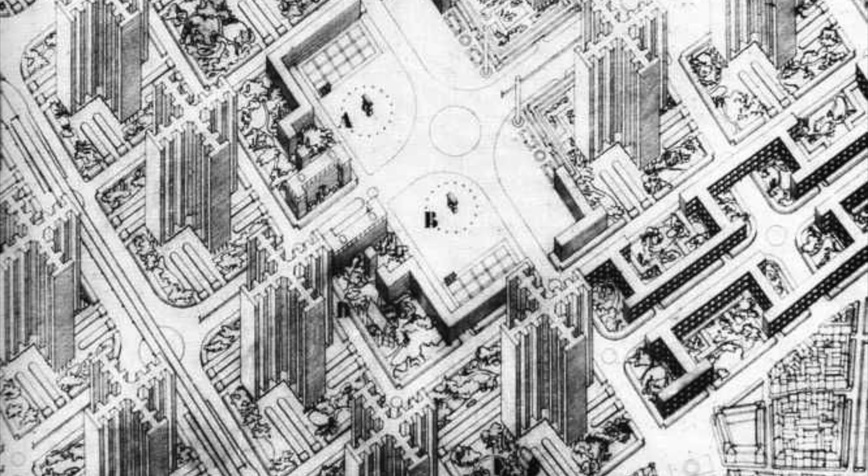The core problem for architects of the 20th century was the ordering of society around the idea of industrial production. In the past, architects focused on the craft of a master mason or the master carpenter. In the industrial age, this craft was abandoned and replaced with mass production.

What forms were best for communicating this new organization in society? Should we design all buildings to look like factories and all housing to look like factory worker housing? "An architect must be a prophet in the truest sense of the term. If he can't see at least 10 years ahead, don't call him an architect."

Frank Lloyd Wright. The second problem of the 20th century was new technology. How should architects incorporate new scientific breakthroughs into architecture? Electric lighting, HVAC, and structural design were all new to architecture.

Walter Gropius said, "We want an architecture adapted to our world of machines, radios, and fast cars. With the increasing strength of new materials, steel, concrete, glass, and with the new audacity of engineering, the ponderousness of old methods of building is giving way to a new lightness and airiness."

The third problem to be solved was one of new industrial materials, glass, steel, concrete, and aluminum being the most important. The fourth problem was to develop a new modern concept of space. How do architects represent the fast space of an automobile, a train, or an airplane? Architects responded by creating interlocking spaces, hovering volumes, and interpenetrating planes.

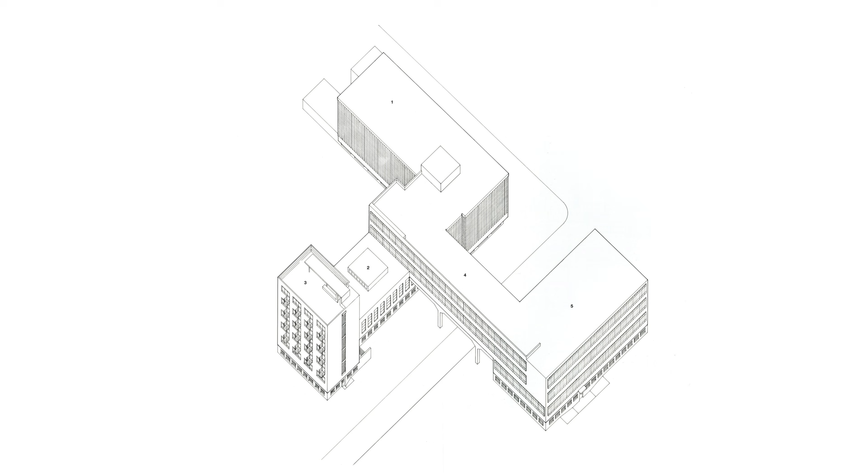It was a reaction to mass industrial production and was based on radical workers' groups. The mood in Germany was a juxtaposition of angst and despair with hope for a utopian future. In this context, Walter Gropius founded the Bauhaus in 1919. Its aim was to fuse art and craft using new industrial processes and technocratic ideals.

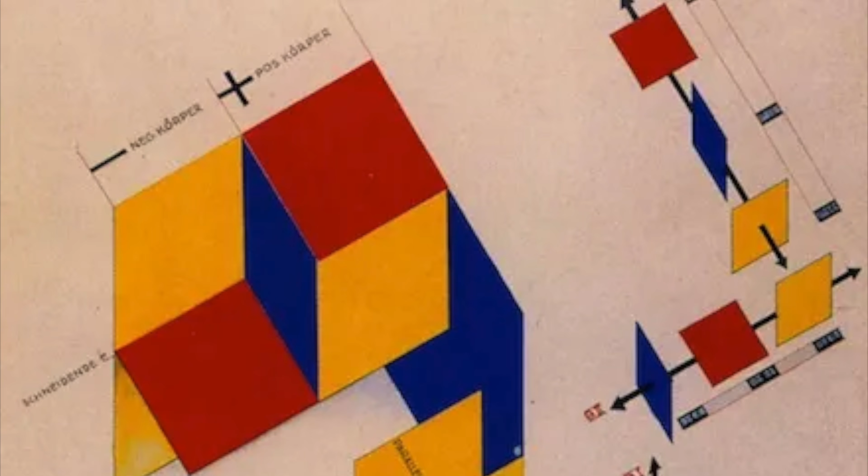At this point, architects were learning how to integrate new technologies of mass production, glass, and steel to create a new visual language of forms. Gropius had students design for mass production and seek to express these new values of mechanization. Gropius had a huge effect on architects such as Paul Rudolph, I.M. Pei, and Philip Johnson. The Bauhaus has had a huge effect on culture, from mass-produced multifamily housing to IKEA.

Number 9. S.O.M. S.O.M. isn't a specific architect, but an architectural firm of many architects. It started as Skidmore, Owings, and Merrill. At one point, it was the most important architecture firm in the world. They're on this list because they had one of the most important roles in developing modern architecture.

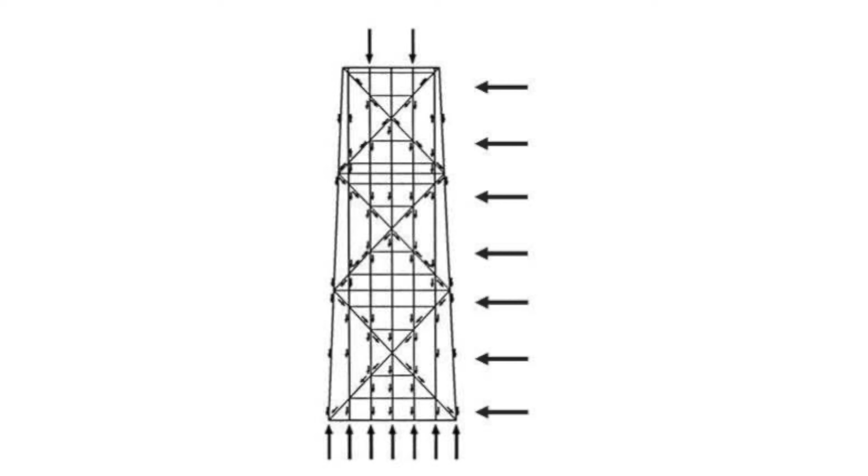Specifically, they designed the modern form of the skyscraper and some of the tallest buildings in the world, to include the John Hancock Center, the Willis Tower, One World Trade Center, and the Burj Khalifa. The John Hancock Center, 1969. The John Hancock Center of Chicago of the 1970s was designed by Bruce Graham of S.O.M. They took the Miesian formula and modified it to be diagonal braced tubes. This cross-bracing dealt with the lateral wind forces.

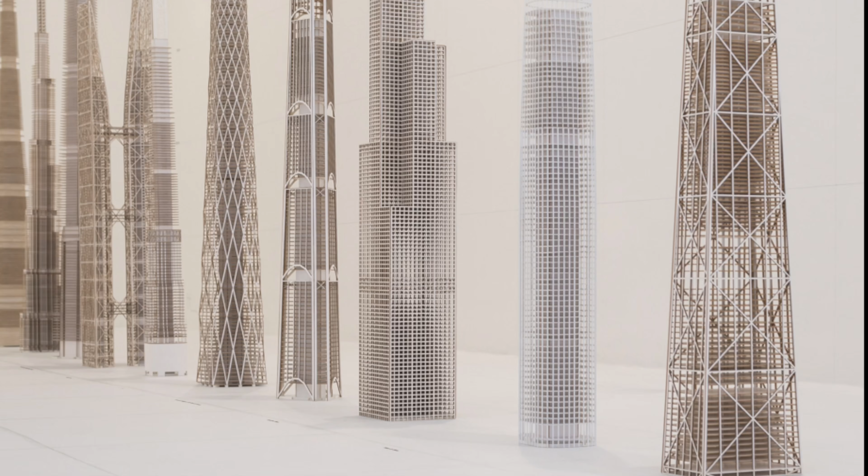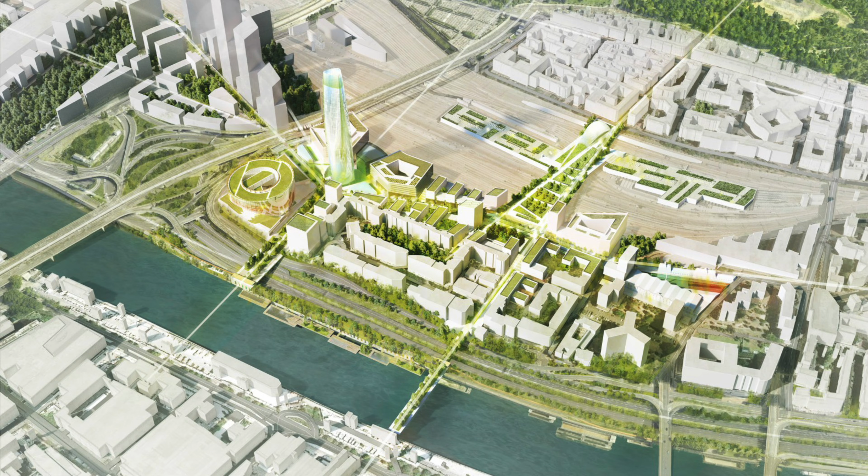S.O.M. developed a standardized big business version of Mies van der Rohe's technological purity, the steel frame, tinted glass, and refined finishes. They epitomized American love for high technology and megastructures. The skyscraper was a central preoccupation of American architecture and symbolized capitalism's dominance over the world. They are the prototype architecture firm that integrates structural engineering, architecture, civil engineering, urban design, and interior design.

The Burj Khalifa has been the tallest skyscraper in the world since it was built in 2010. The design is based on Islamic architecture of the region. The primary structure is reinforced concrete with some structural steel. It was designed to be a centerpiece of large-scale mixed-use development.

One World Trade Center, New York. Designed by David Childs of S.O.M., One World Trade Center is the tallest building in the United States and the 7th tallest building in the world.

Number 8. Carlo Scarpa. Carlo Scarpa is perhaps the most important architect you've never heard of. He wasn't known outside of Italy until the 1980s. Unlike other modern architects who wanted to tear down traditional architecture and replace it with modern abstract forms, Scarpa was deeply sensitive to existing context and tried to integrate new with the old.

His architecture delighted in stratification, layering, and the dynamic interaction of planes. Frank Lloyd Wright was a primary influence on Scarpa. A central part of his practice was the restoration and reuse of old buildings. He developed a method of juxtaposing new with old fragments so that each was enhanced. The effect was to feel the passing through layers of time.

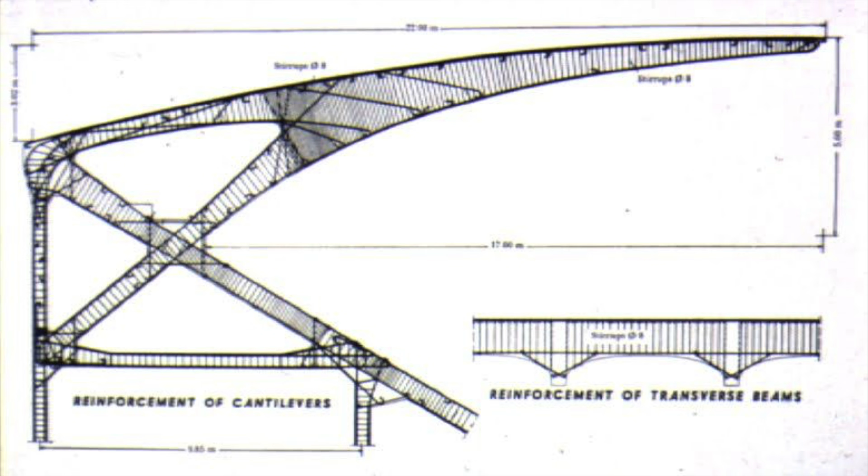Number 7. Pier Luigi Nervi. Pier Luigi Nervi was an Italian engineer and architect. His structures illustrated the engineering principle of bringing structural loads down into the foundations with minimal use of materials. Nervi saw building structure as an art. He demonstrated how engineering and sculptural expression could be synthesized into a naturalistic expression of form and function.

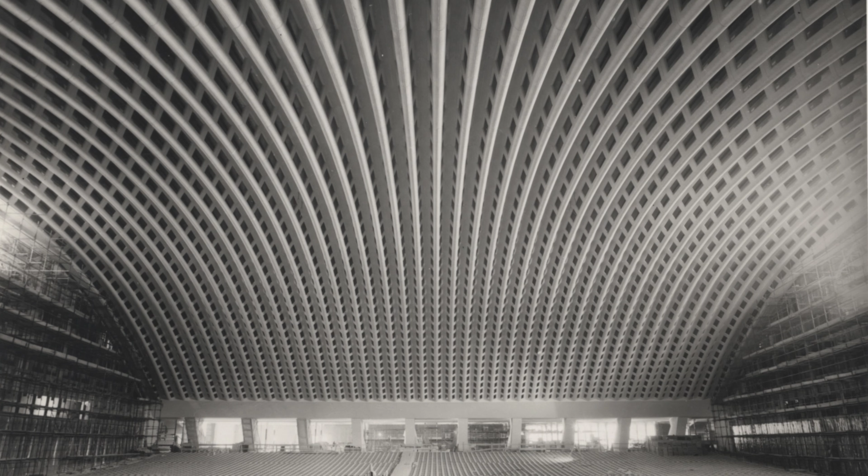Nervi was intuitive in his methods of design, and his buildings seemed like descendants of grand structures of history. His numerous stadiums, factories, exhibition halls, and bridges demonstrated how engineering and sculptural expression can achieve a synthesis of form, giving an almost natural character.

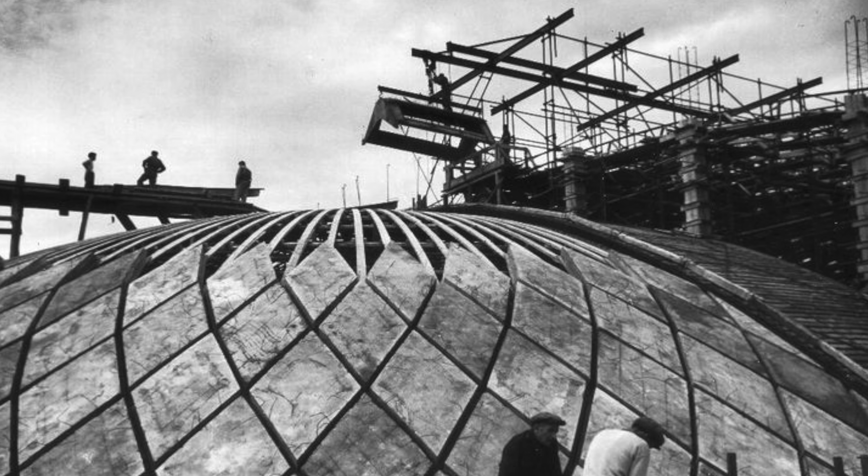Agnelli Exhibition Hall, Turin. Nervi used open precast concrete ribs with slender profiles resulting from the imprint of diamond-shaped plans to realize a shell vault. Gatti Wool Factory, Rome. Slender columns and flared capitals were supported on a radiating network of two-way beams, which expressed the pattern of underlying stresses.

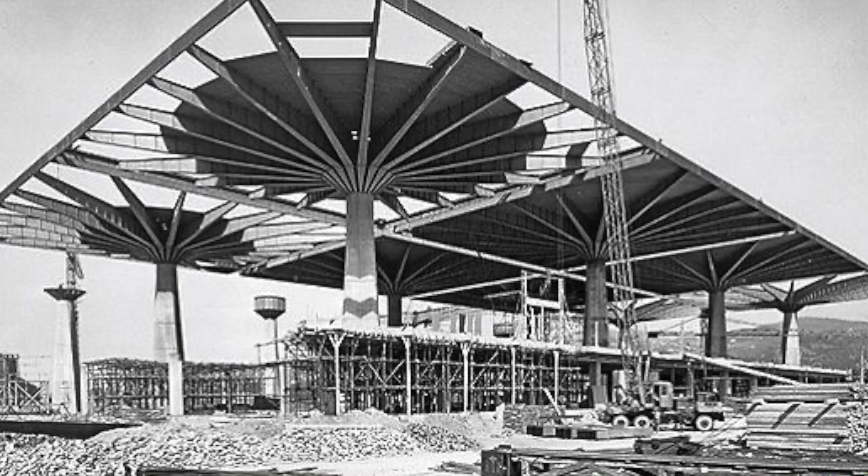Palazzo del Lavoro. For the Palazzo del Lavoro, Nervi created an open space with a grid of freestanding columns, each supporting a square roof unit on splayed beams. The solution allowed for an entirely glazed perimeter and for strips of natural light between the square roof elements. Nervi is the direct inspiration for architects like Santiago Calatrava.

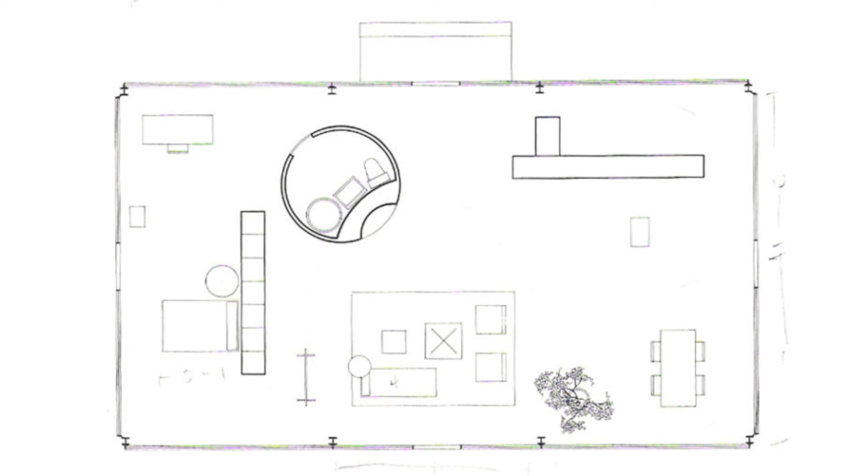Number 6. Philip Johnson. Architecture is how to waste space. In 1932, Johnson, along with Henry Russell Hitchcock, wrote the book International Style: Architecture since 1922. This did several things. It changed modernism from a technique and process of design into a style. This was a lie, as modern architecture up until this point was not a style.

Le Corbusier said, "Styles are a lie." Philip Johnson, in disagreeing with Le Corbusier, turned modernism on its head. Secondly, it turned German architecture of the Bauhaus into an international style. These two lies together created a new vision for modern architecture as an international style.

Philip Johnson was perhaps the first openly gay architect in history, coming out publicly in 1993. He was a great cheerleader for architects of his time. He helped bring Mies van der Rohe to the United States and designed the Seagram Building with him in 1954. He was the first director of the Museum of Modern Art in New York and brought Gropius and Le Corbusier.

In 1932, he organized the first exhibit of modern architecture. He was also the first to have a show on industrial design and can be said to have brought this art from the Bauhaus to the United States. Philip Johnson invented the term postmodern architecture, or was the first to use it widely. He was a great promoter of other postmodern architects such as Robert Venturi, Frank Gehry, and Michael Graves.

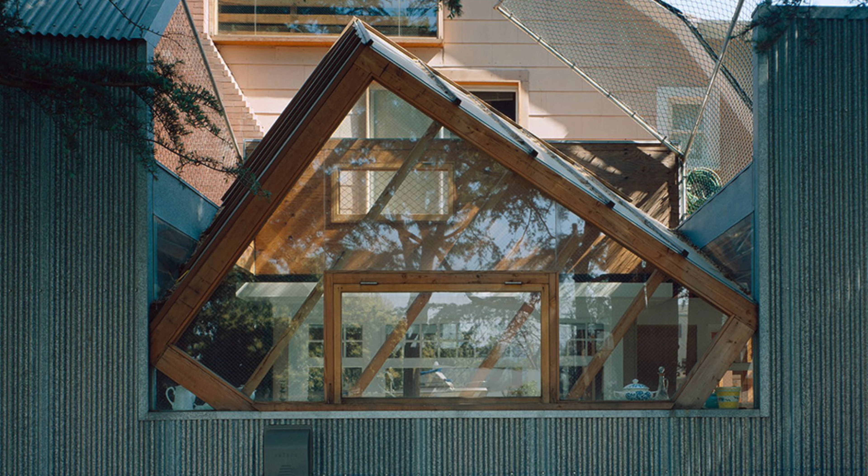People ask me if I'm an artist or an architect, but I think they're the same. Frank Gehry is a Los Angeles-based architect. He's considered a postmodern architect. Gehry said, "I think the biggest problem of industrial architecture is that it loses its sense of humanity. Minimalist stuff drains all the humanity out of it. The idea works great for the money thing, but it doesn't work well for the feeling thing."

Gehry's most famous building is the Guggenheim Museum in Bilbao. It was so successful it created the Bilbao effect, which is a term coined to express how an iconic piece of architecture could revitalize the tourism and rebuild the economy of the city. Cities around the world hired architects to design large-scale, eye-catching architectural commissions, for good or for bad.

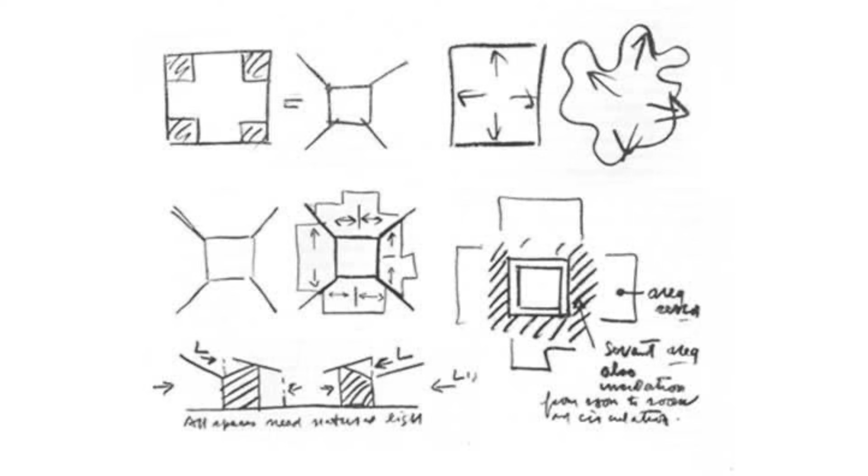Louis Kahn. Architecture is the thoughtful making of space. Kahn achieved an integration of the modern and the ancient. He was a master of monumentality. His deep humanism enabled him to avoid mere shape-making of formalists. He knew how to fuse together modern construction with traditional forms and methods. Kahn's method used the parti diagram as the main generating idea of a composition. This comes from the Beaux-Arts system.

Kahn said, "You say to a brick, 'What do you want, brick?' And the brick says to you, 'I like an arch.' And you say to the brick, 'Look, I want one too, but arches are expensive, and I can use a concrete lintel.' And then you say, 'What do you think of that, brick?' And the brick says, 'I'd like an arch.'"

Kahn said, "I would say that architecture is a thoughtful making of spaces. It is not filling prescriptions as clients want them filled. It is not fitting uses into dimensional areas. The architect's first act is to take the program that comes to him and change it, not to satisfy it, but to put it in the realm of architecture, which is to put it in the realm of spaces."

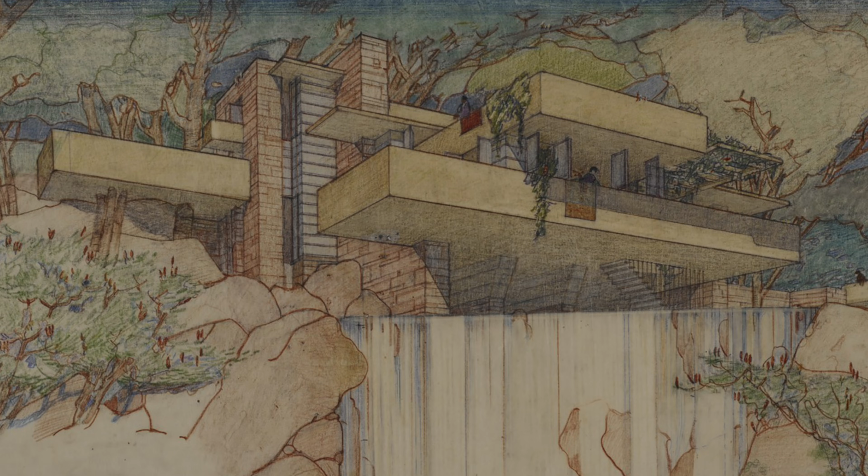Number 3. Frank Lloyd Wright. Study nature, love nature, stay close to nature. It will never fail you. Frank Lloyd Wright is often misunderstood as an architect. Some see Wright as a traditionalist with American values of individualism, naturalism, and democratic ideals. He is backward-looking, coming from the American arts and crafts movement.

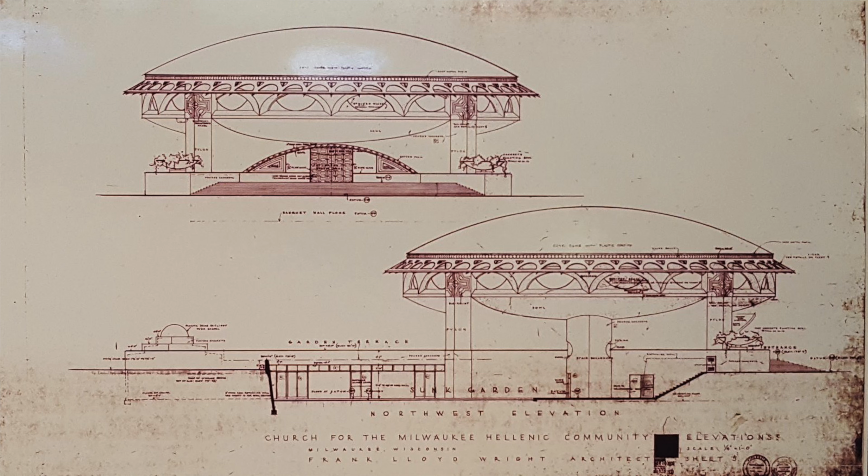Some see Wright as a precursor to modernism with modern universal interpretations of spaces and abstract massings. These ideas always compare Wright to the broader history of architecture. Both these interpretations of Wright are misleading. He was, in fact, a singular architect with his own style and worldview and does not fit easily into the history of architecture. The best way to understand Wright is his continuation of the ideas of Louis Sullivan, his mentor, and the development of his architecture into a purely individual and unique modern style.

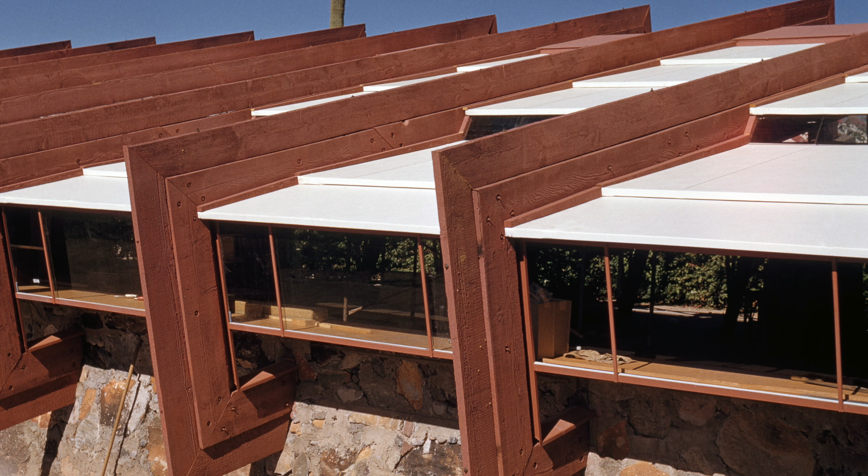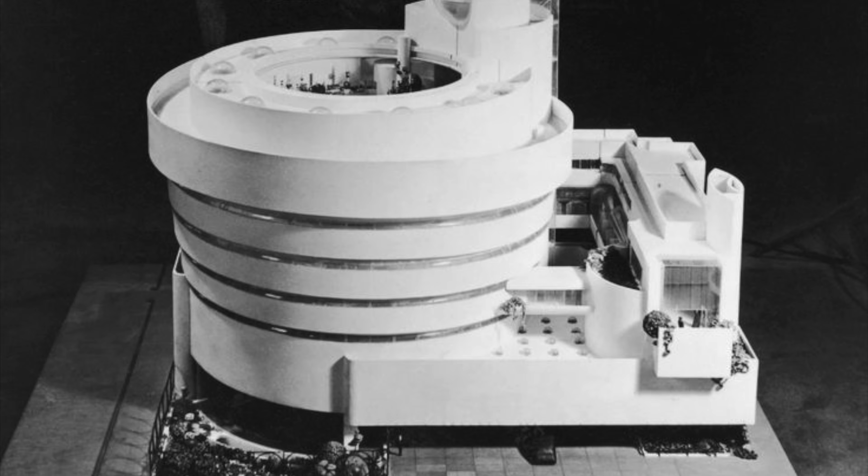Most of Wright's ideas on organic architecture, ornamental design, nature come from Sullivan, but he also added classical architectural ideas. But unlike Sullivan, Wright transformed space in a modern way by manipulating volumes of rooms and spaces. Wright designed space like music, where rhythm, movement, repetition, and variation of elements was key. Like other modern architects, Wright was concerned with integrating arts and crafts and new machine-age technologies.

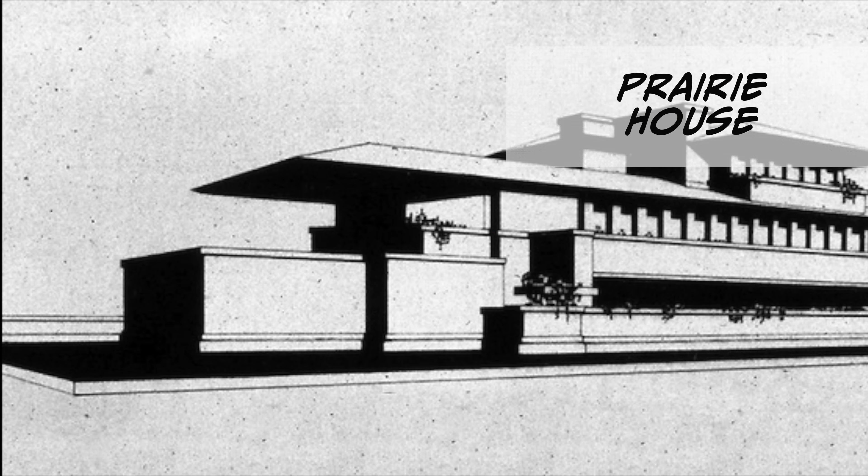The Robie House. The Robie House is the clearest expression of the prairie house ideal. The Prairie House was a set of principles or archetypal elements that set up the psychology of the home. These would include the hearth as the center of the home, the plinth as a base, the roof as a tent-like structure, and walls and columns for enclosure. Unity Temple. Unity Temple was an exercise in first principles for Wright.

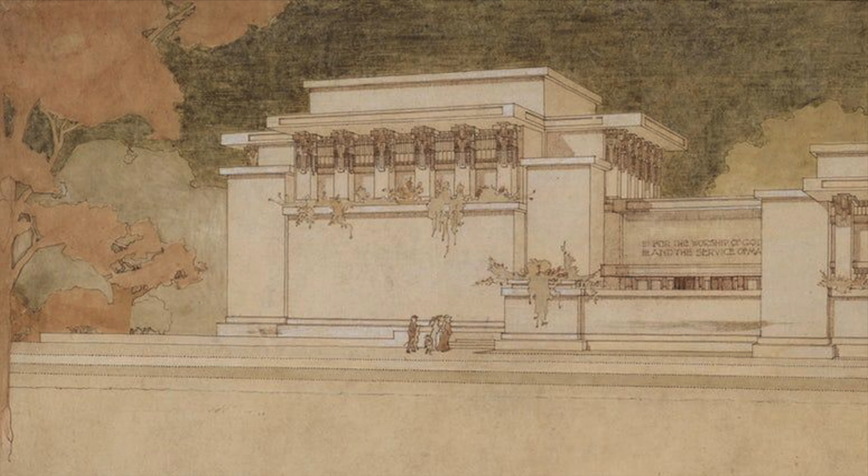Wright's American influence was considerable, especially among his Midwestern followers of the Prairie School. In Europe, his works were mostly known through photos and drawings, and thus a mythological version of Wright was created in architects' minds. Two of Wright's students were from Vienna, Rudolf Schindler and Richard Neutra, and after studying at his atelier, went on to be renowned modern architects themselves.

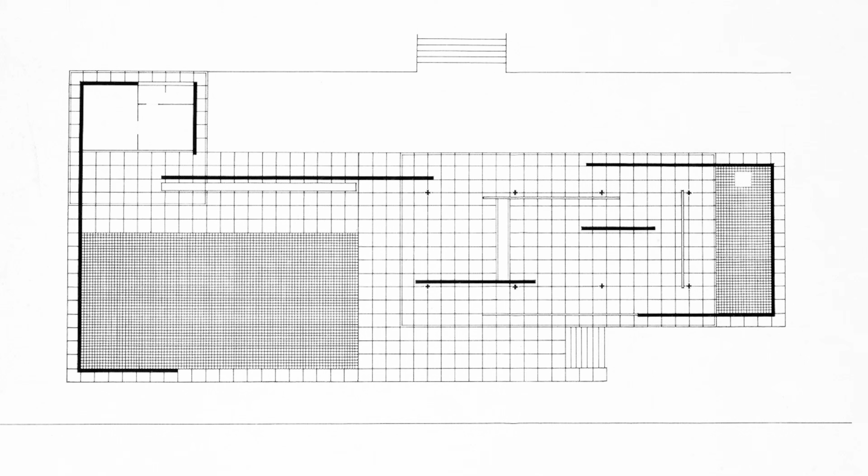Number 2. Mies van der Rohe. Less is more. Barcelona Pavilion, International Exhibition in Barcelona, 1929. Mies van der Rohe was a German architect who moved to the United States and who developed a rectilinear style based on poetic accentuations of structure and technology. His skyscrapers were rationalist constructions where he strips down the building to its essential structure, then wraps it with a curtain wall of glass, creating a minimalistic solution. This is a dematerialization of building structure and would become the international style.

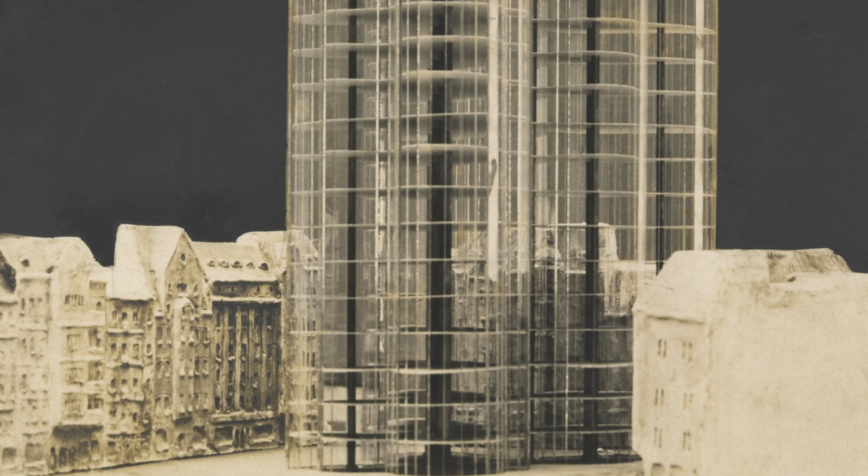He created a utopian vision for an industrial future. The skyscraper becomes the cathedral of modernity, an expression of culture's highest aspirations. The irony is that this utopian vision of the future became the boring symbol of capitalism.

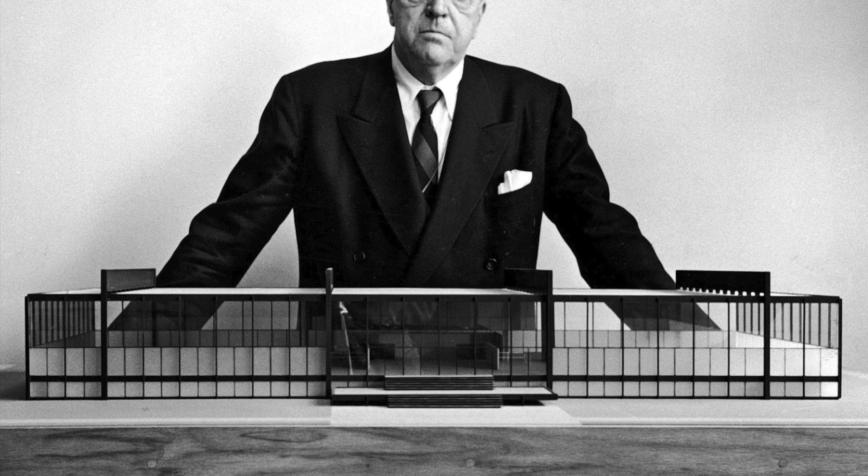Crown Hall, Illinois Institute of Technology, Chicago, 1950. Crown Hall was the image of a factory with vast universal space. It used a dramatic truss system that created structural clarity while celebrating American steel craftsmanship. The glass box was space good for everything. The symmetry, proportion, and clear expression of load and support were a modern interpretation of neoclassical architecture.

Mies, it may be argued, is the most copied modern architect. Philip Johnson's Glass House is a direct copy of Mies's Farnsworth House, and S.O.M. made a career of copying Mies's style exactly in their skyscraper designs.

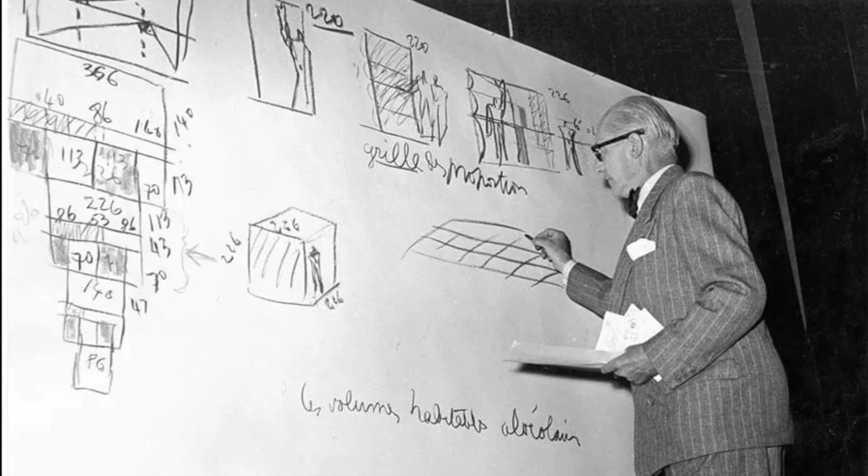Number 1. Le Corbusier. Architecture is the masterly, correct, and magnificent play of masses brought together in light. Le Corbusier was a painter, architect, writer, and theorist born in Switzerland. He is arguably the most influential architect of the 20th century.

Le Corbusier was increasingly interested in reinforced concrete and the use of this material in context of industrialization. This allowed for large, uninterrupted spaces on the interior. Imitators of Le Corbusier took this idea and created brutalism, which used rough concrete as the primary building material.

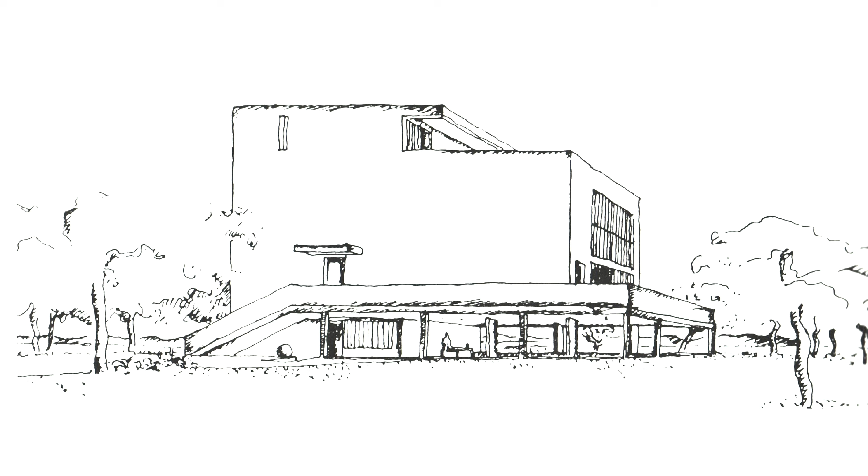A house is a machine for living in. The idea of mass production housing was as important as the fact. The idea was a house whose function had been examined from the ground floor up and stripped to their essentials. This promised a new life where people could look out past pure white walls to the essential joys of light,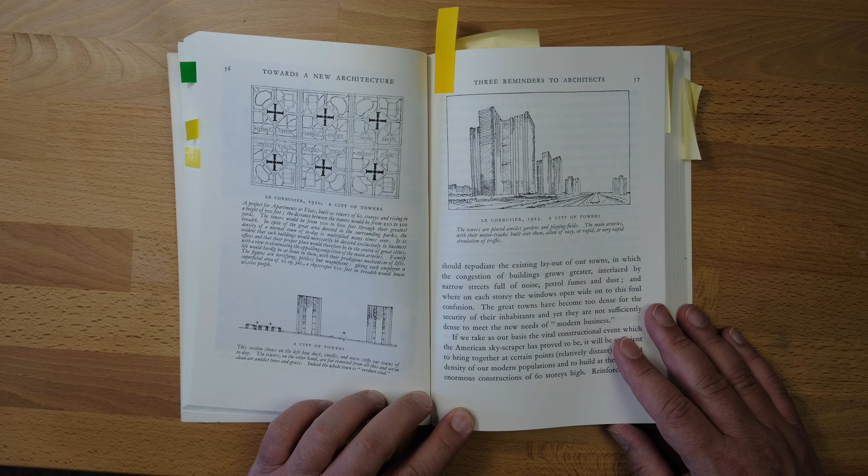space, and greenery. Science has given us the machine. The machine gives us unlimited power, and we in our turn can perform miracles by its means. His book, Towards a New Architecture, is a manifesto of modern architecture. It has been one of the most influential architectural books of the 20th century. It argues to throw away old forms and ways of doing architecture and embrace mass production and the machine.

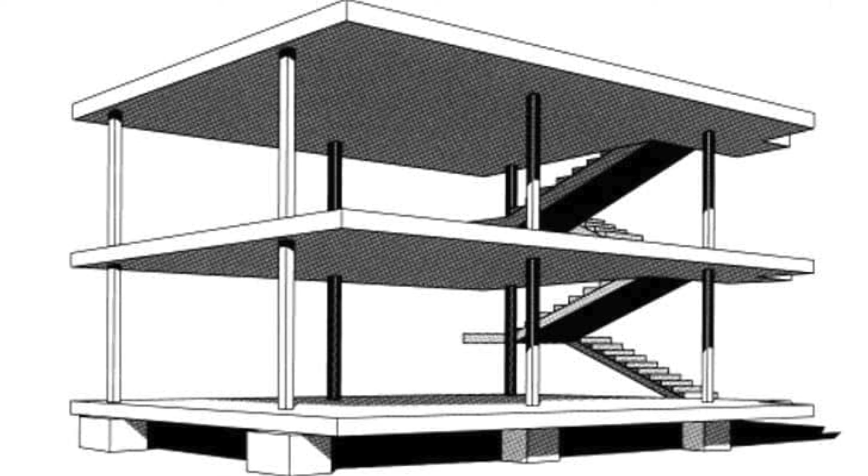His ideas coalesced into 5 points of modern architecture. This was a vocabulary of architectural forms based on reinforced concrete construction. They were, number 1, the pilotis. This was a central element from which all others evolved. It allowed the building to be lifted off the ground. Ribbon windows. Often this meant horizontal strip windows running the full length of the building. A free plan.

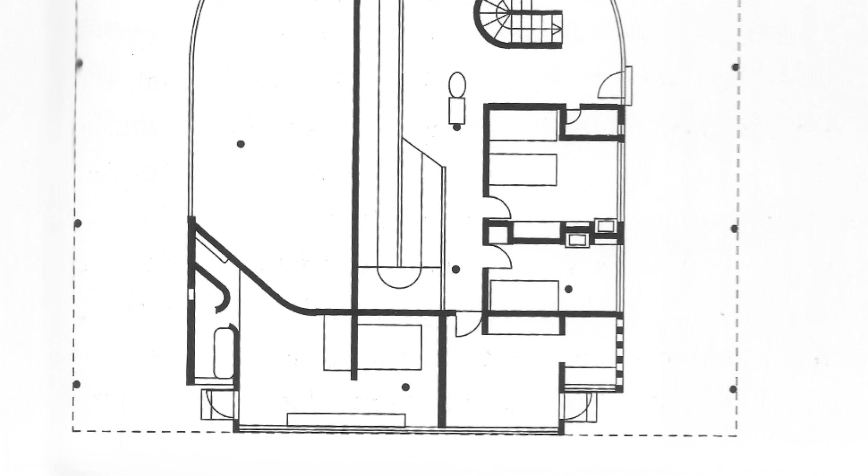With pilotis supporting the weight of the building, the interior and the exterior walls freely move anywhere based on the functional demand. Free facade. The free facade allowed for all windows or curtain wall or any sort of openings based on functional requirements. Terraced gardens on the roof. Concrete allowed for the roof to be a structural member that could support greenery and become an exterior space to take in earth and sky.

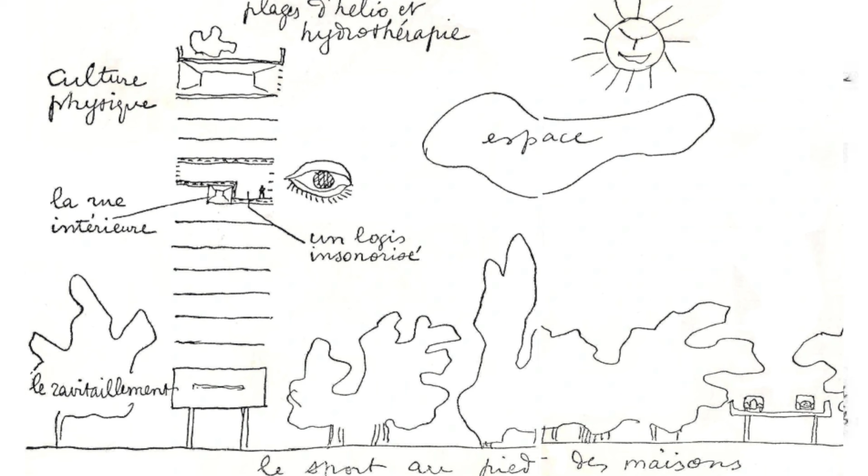Villa Savoye. We can see all these elements come together in the Villa Savoye. The Villa Savoye had pilotis that elevated the main floor up to the second level to create a piano nobile. By using pilotis, the exterior walls were not structural and the windows could be placed anywhere. Pilotis also allowed for a free plan, as no structural walls were required. This allowed for a free facade, creating windows or brise-soleil, which were sunscreens. Finally, the roof could be flat and a terraced garden could be placed there.

Le Corbusier painted daily, and his abstract cubist-like paintings, which he called purist, gave him a rich vocabulary of forms for his late architecture. Ronchamp. Ronchamp is perhaps the most singular masterpiece of Le Corbusier. Like Picasso, he focused his ideas on primitive forms and ancient associations. There is a tension between modernism and primitive forms.

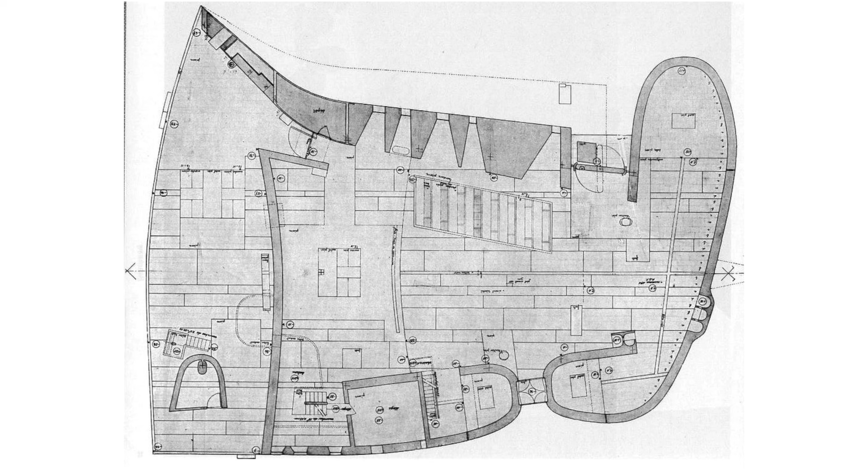Le Corbusier is perhaps the second most copied architect after Mies van der Rohe. Steven Holl, for example, has made a career from copying Le Corbusier. His St. Ignatius Chapel is a thematic copy of Le Corbusier's Ronchamp.